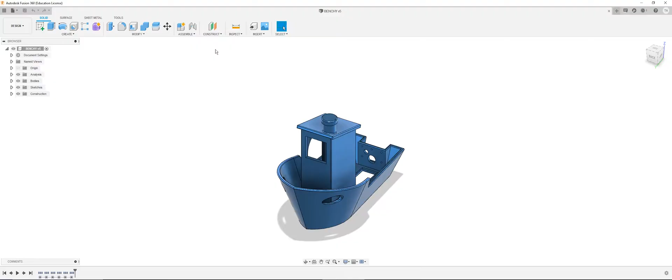This project is a little bit more advanced, but it's a great challenge for beginners trying to learn Fusion or 3D designing in general. The Benchy model is a 3D model used for accuracy tests for 3D printers, so if you're into 3D printing, you'll probably recognize this. This is the model you'll be recreating, and this is the result after following this series.

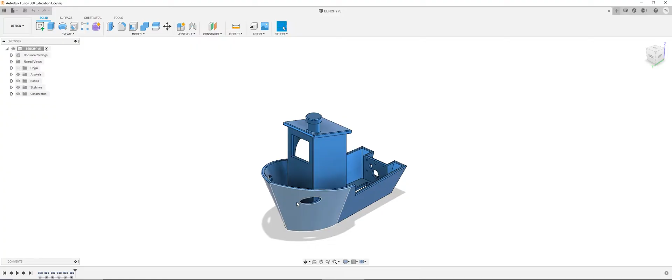For this lesson, we'll be just creating the body of the boat. Before I start, our goals for this video are to design the main body of the Benchy, use the tangent, midpoint, and equal constraints, use the offset sketch and plane tool, use the project command, and use the loft command.

I'm going to start with a brand new file open. I'll show the data panel and create a new project, just name it Benchy series, or give it any name you want. Now that we have that created, let's start designing.

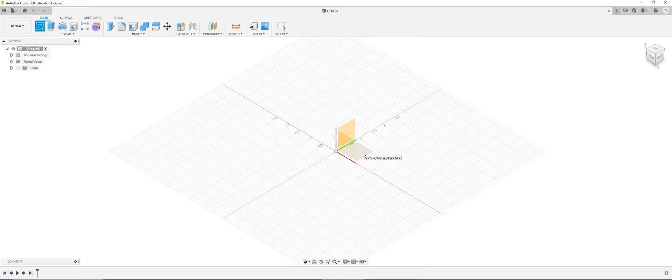For this body, I want to sketch the shape of the bottom of the boat. So I'm going to select this bottom plane right here, which brings this to this plane. I'm going to create a line, which you click right here, or press L for line.

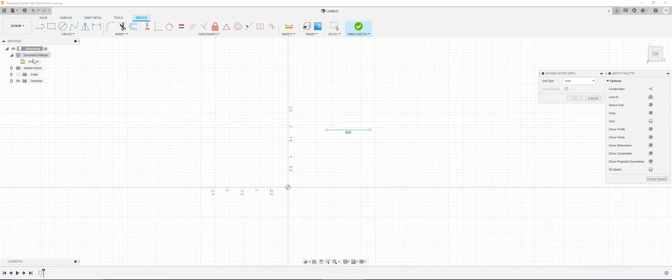I'm just going to place it in space instead of connected to the origin. I'll set my dimensions first by going under the document settings and changing the active units. I'll select millimeters and click OK. Now we're in millimeters.

Now I'm just going to dimension this. You can either click up here or press D for dimension. I'm going to set it to 25 millimeters.

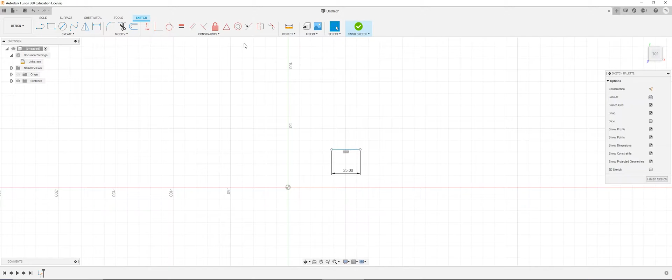I want this line to be in the exact middle of the origin, so I'm going to use the midpoint constraint. This will find the midpoint of this object, which is a line, somewhere around here, and bring it to another point, setting it right down in the middle. Now it's exactly symmetrical on this line.

This boat that we're creating is actually symmetrical, and it's really important to keep in mind when you're 3D designing things that are symmetrical. It's always a good idea to do your sketches in symmetry, so keep that in mind—it's a good habit to build.

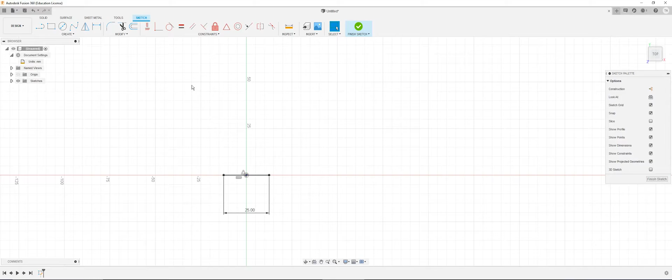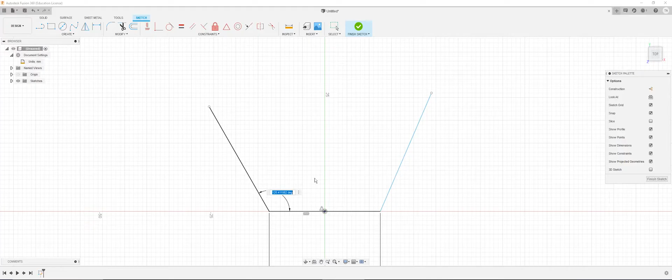For these lines, I want them to be exactly equal in length. So I'm going to select the equal constraint and select both lines, and now they're both equal. Whenever I change the length of one line, it's going to change the other.

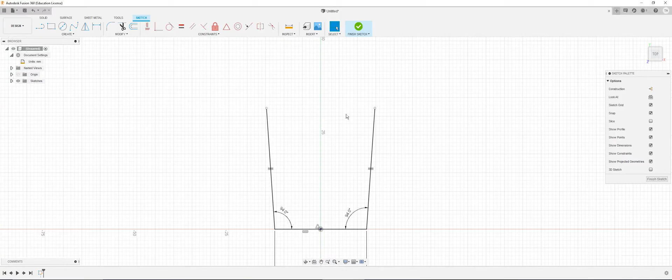Now I want to create a point up here—actually, I want to create two points. I'm going to go to Create and select Point. I'll select one right here and another.

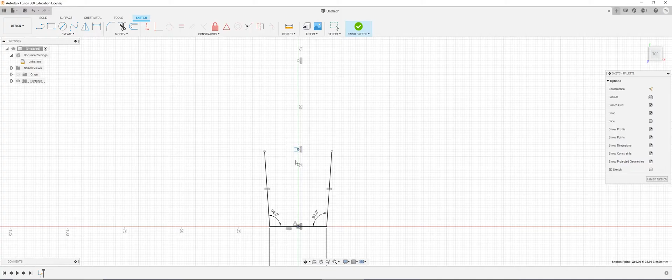I want these points exactly in line right here, vertical to this. I'm going to select the horizontal/vertical constraint and this origin point, which brings it exactly vertical to the origin point. I'm going to do the same for this. Now they're both set on this vertical line and can't move left or right, which is perfect.

I'm going to dimension this first point from the origin to be 55 millimeters away, and I want to set this first point and the second point to be 25 millimeters apart.

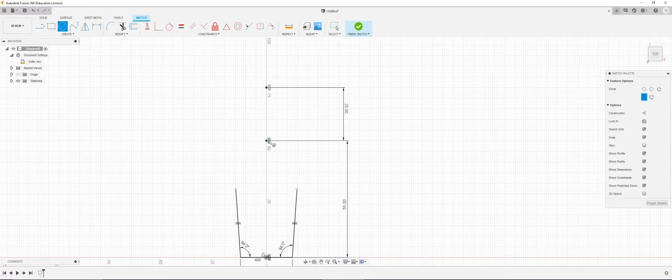Now I'm going to create a circle right here at this first point. It doesn't matter how big, since we're not actually going to dimension the diameter of this circle—we're going to leave it undimensioned.

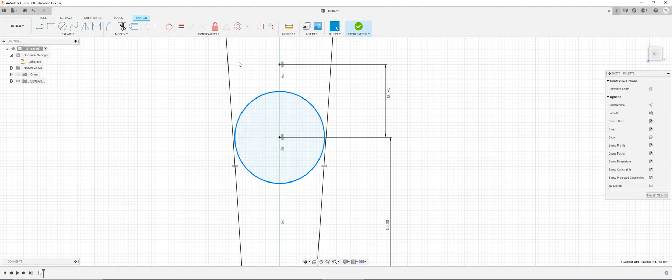I'm going to bring this line up just past this circle. I want this circle to touch these lines, so I'll select the tangent constraint, which makes the circle just touch the line without intersecting it.

If you know what tangency is from mathematics or somewhere else, it will make perfect sense. You can see how this circle is just touching the line but doesn't actually intersect it, which is perfect, and that's what we want.

Now I want to get rid of this excess line. So I'm going to click here to trim, and I'm going to select this and this.

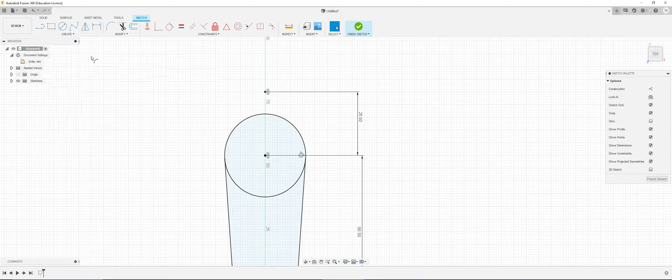Now I want to create that pointy arc shape right here. So I'm going to go on create arc and 3-point arc. I'm going to select this first point, then select somewhere along the circle, which we can see by the X, meaning we're exactly on the circle. I'm going to select anywhere and just move it up. It doesn't matter where you set the radius or shape of the arc to — I'm just going to leave that on purpose.

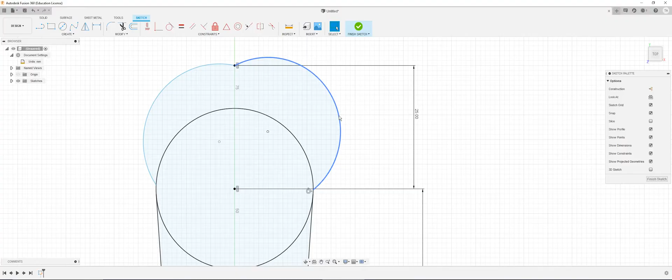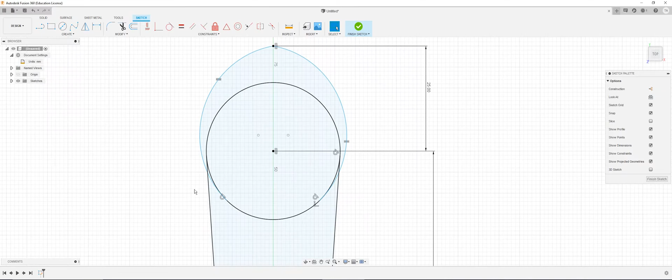What I want to do is set them to be equal, just like we did with the first line. It's not letting me set equal, so I'll use the equal constraint right here. Now they're both equal. Next I want to create an arc that flows smoothly and becomes tangent, just touching this circle. So I'm going to select the tangent constraint again, select this arc and select this circle, and do the same for this one. Now you can see how this arc moves and transitions smoothly, just touching right here.

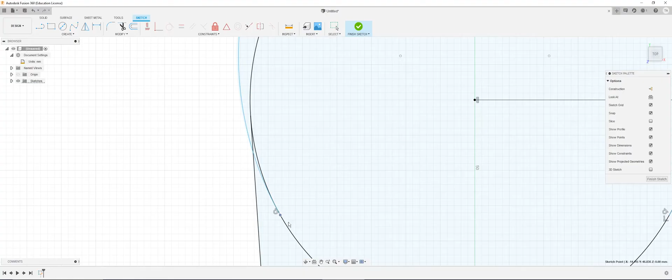Now we want to bring this endpoint and connect it to this line that's tangent with this circle. You can grab the endpoint and manually move it up, or use the coincident constraint. This will bring the endpoint and connect it along with this point of the line right here — it matches up, so both points are laying on top of each other, and now they're connected.

Now we finally have our sketch, which is the bottom of the boat.

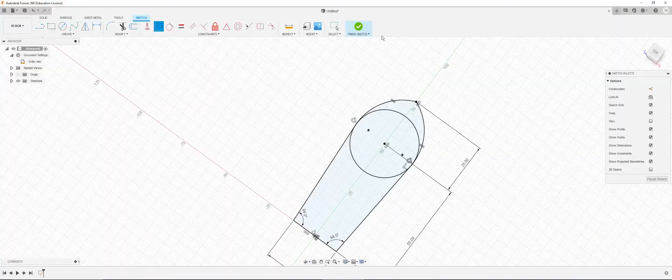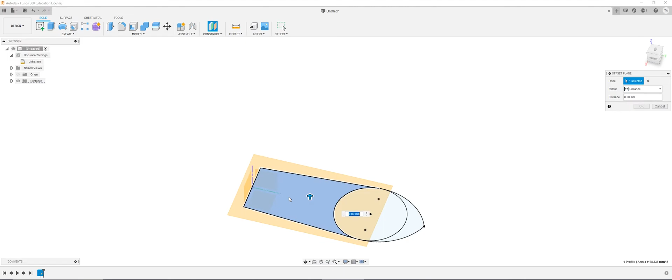Now we're going to bring a plane right here. We go under construct and click offset plane — you can click this picture, which says the same thing, offset plane. You can either select any part of this sketch or this plane, since we did this sketch on the same exact plane, so I'm going to select this part. I want to offset this plane to 37.5 millimeters. Just click OK, and now we're going to create a new sketch on this new plane that we made.

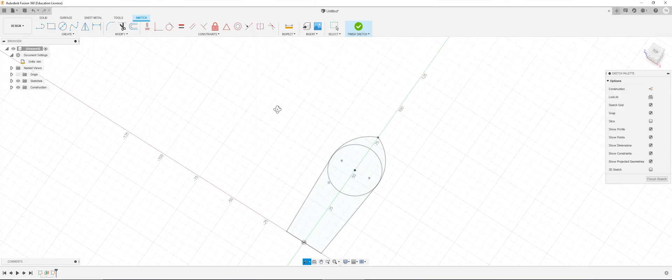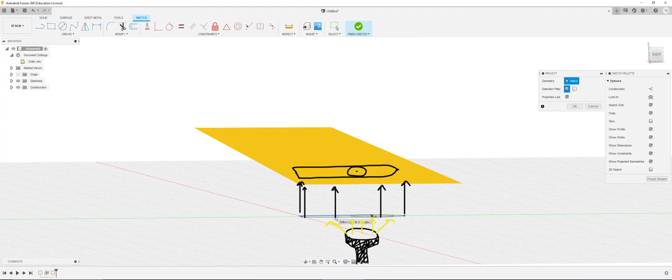Now we want this same exact shape, but bigger, so we'll use the project command. I'm going to go on create, then project/include, and click project — or press P for the shortcut. Project is going to take these lines down below and project them onto the plane we're working on above. Imagine there's a flashlight right below here creating a shadow above this plane, and whatever that shadow is, that's what's being projected onto that plane. Project is a very important command that you'll use a lot throughout 3D designing.

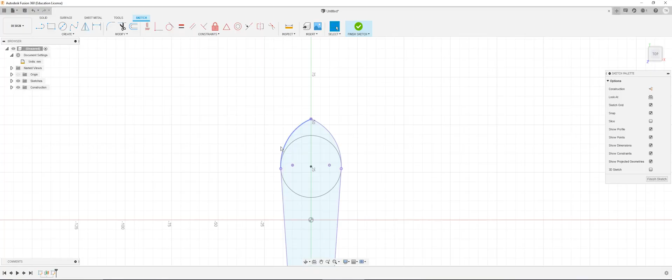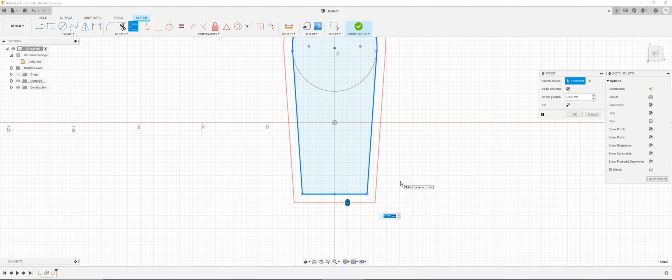Now I'm going to go back into the top view and start selecting the geometry that I want, then click OK. Now we have all these points to work with. So I'm going to click offset and select the geometry again — you can see the red lines showing it offsetting, going either inward or outward. I want to offset this sketch by 15 millimeters, then click OK, and now I have that same exact sketch, but bigger, which is what we want.

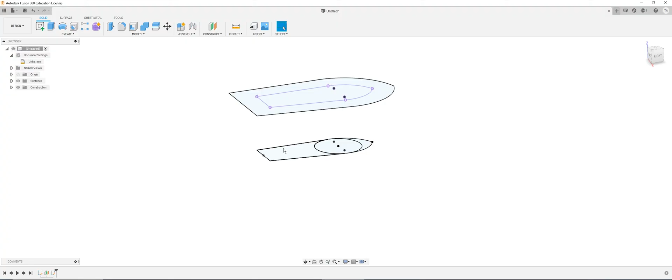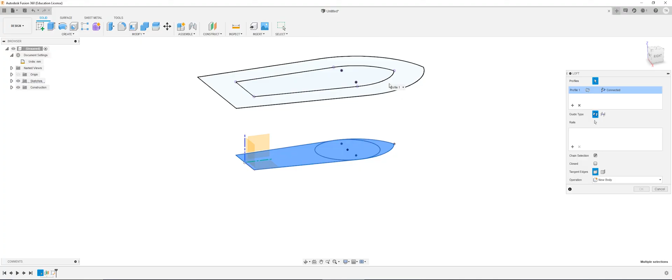Now we have two different sketches of the same shape, but one's bigger and one's above. We want to connect these two to create a solid that transitions from the bottom sketch to the top sketch. To do that, we go on create and click loft, and it asks us what profiles we want to loft. So I'll select these — you can select this one along with it or not. Now you can see how the loft command creates a solid and transitions from one shape to another.

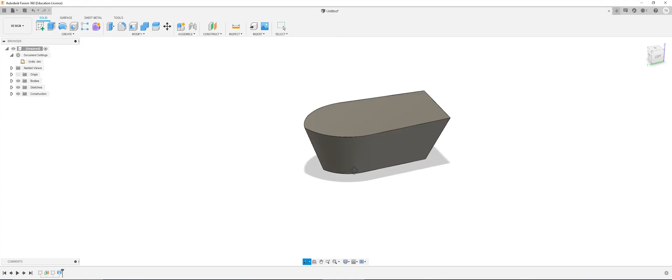We click OK, and now we have the main body of our Benchy boat. That's what we have for this video, and in the next video we're going to keep working away with this main body.